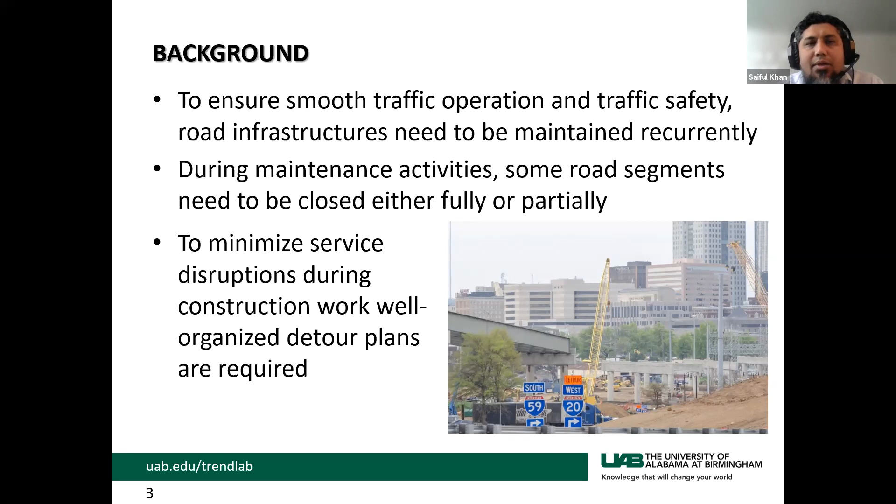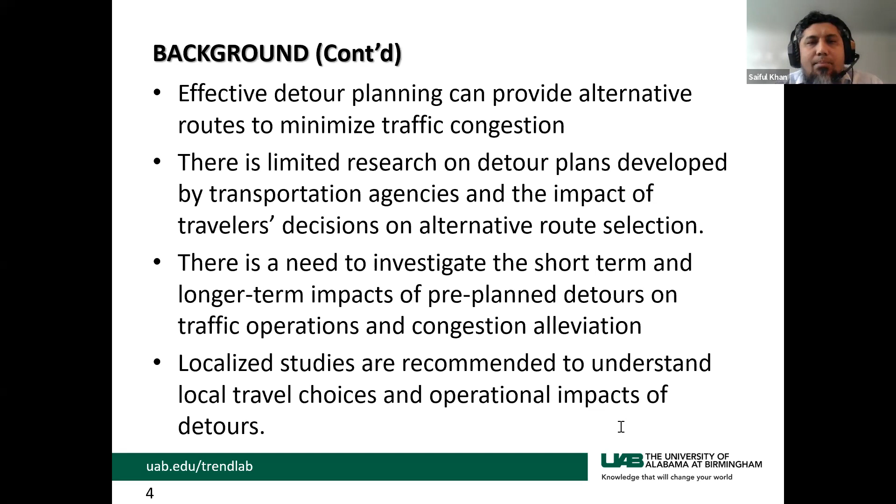So an efficient detour plan is essential to reduce traffic disruptions, but to design an effective detour plan, it is very important to identify beforehand the potential short-term and long-term effects of the proposed detours on traffic operations. A literature search on this topic led to the conclusion that there is much research done on construction work zones, but very limited studies that examine the impacts of complete road closure and detours on traffic operations. Local studies are recommended to reflect the impacts of local conditions. So therefore, in our study, we considered a recently completed bridge replacement project.

Now I would like to brief the project. This project was about the reconstruction work of a 1.5 mile road segment of I-20/59 near downtown Birmingham. The location of the project is very crucial, and it is one of the busiest road segments in downtown Birmingham. While the current traffic flow is 165,000 vehicles per day, it was designed back in the 1970s for only 80,000 vehicles. And it is also anticipated that the traffic volume for that segment will exceed 225,000 by 2035. That is why the roadway capacity needed to be enhanced.

And considering the traffic conditions and to carry out the construction works smoothly on such a busy road, this segment had to be closed for the entire year 2019. And for offering alternative routes to motorists during the road closure, ALDOT along with the City of Birmingham and the Regional Planning Commission of Greater Birmingham prepared a detour plan.

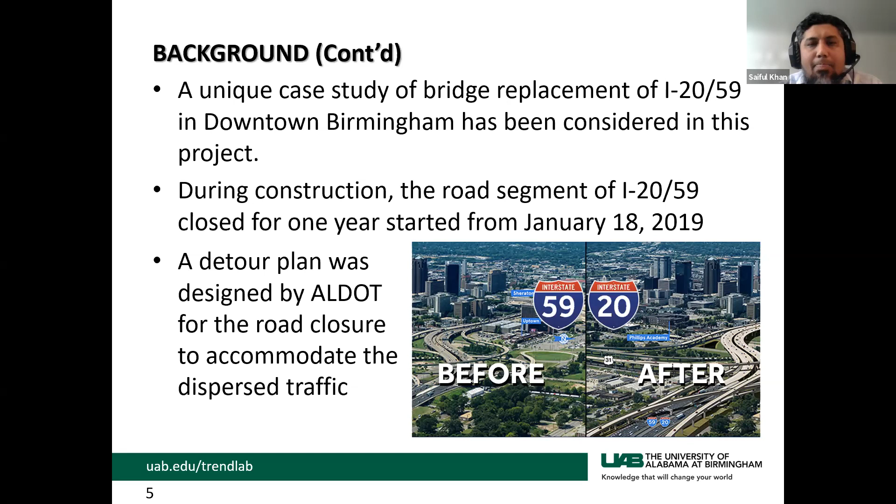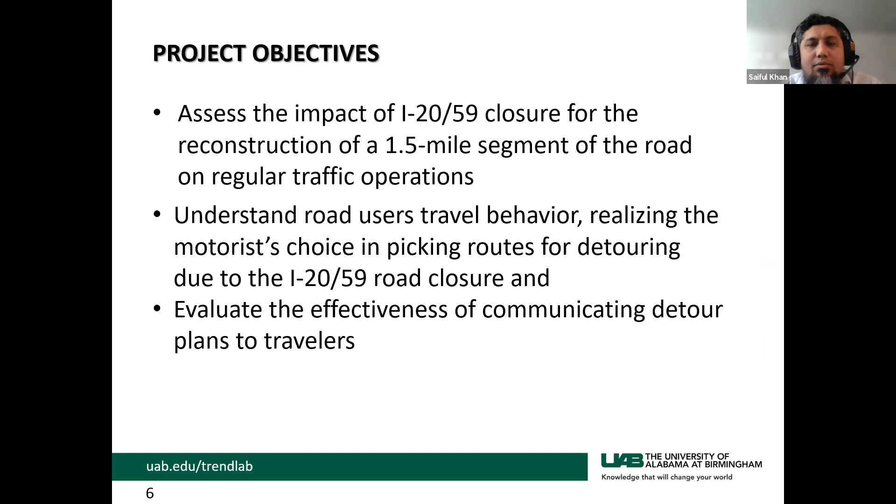So the purpose of our study is to assess the impact of detours on traffic operations at and around the road closure in the Birmingham, Alabama region by understanding the changes in motorist travel behavior during the road closure. That's why we followed this methodology to conduct our study.

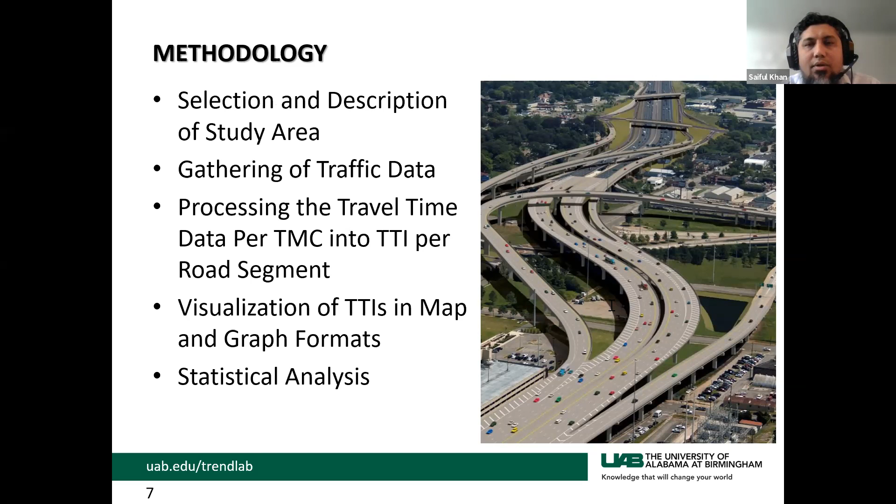First we had to select our study area, then data collection, data processing, and finally producing maps and graphs. We also conducted a statistical analysis for our study. So this is the study area. It was chosen mainly based on the ALDOT detour plan, as well as by analyzing the ArcGIS online roadmaps.

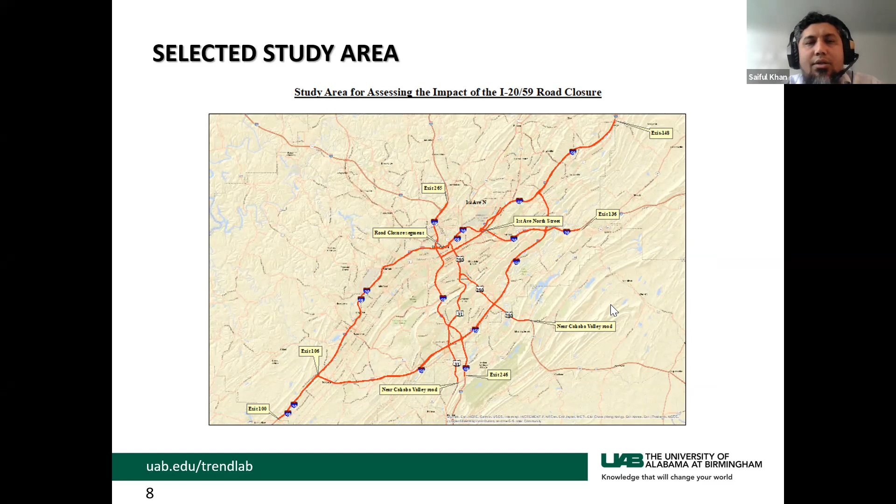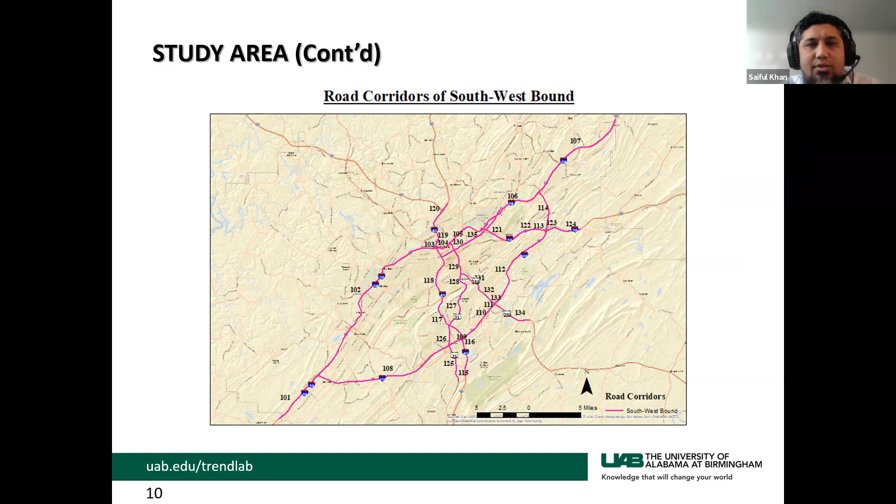For data collection, we collected the travel time data from the Federal Highway Administration sponsored NPMRDS, that is the National Performance Management Research Data Set website. After finalizing the roadmaps, they were synchronized with the NPMRDS dataset. As per the NPMRDS dataset, the selected area had 411 TMCs, that is traffic message channels. For northeast directions, there were 205 TMCs, and for the southwest directions, there were 206 TMCs.

We needed to collect 15-minute averaged travel time data for February 2018, that is before the road closure, February 2019 during the road closure, and February 2020 after reopening of the road. From the NPMRDS website, we collected 10 data points for weekday morning peak hours with 15-minute intervals starting from 6:30 a.m. to 9 a.m.

And 10 data points with 15-minute intervals for weekday evening peak hours starting from 4 p.m. to 6:30 p.m. There are 20 time slot data points gathered for each weekday of the month of February 2018, 2019, and 2020. Our raw data was travel time, but in our analysis we used the travel time index, that is TTI.

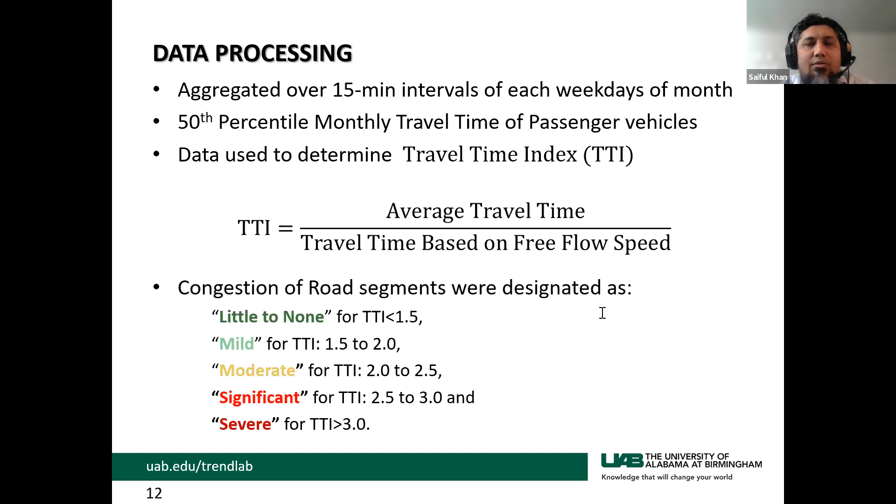Data analysis and results. We divided our data analysis and results part into 4 segments. In the first segment, TTI maps of road segments were developed using ArcGIS software for February 2018, February 2019, and 2020, for morning peak hours and evening peak hours separately.

Then we also prepared some graphs along the study corridors to see the TTI variations in each of the 16 time slots, that is 10 time slots in morning peak hours and 6 time slots in evening peak hours, for the whole 3 years. After that, we identified which roads were vulnerable during the road closure based on the ALDOT designated detour plan. Finally, a statistical analysis was done.

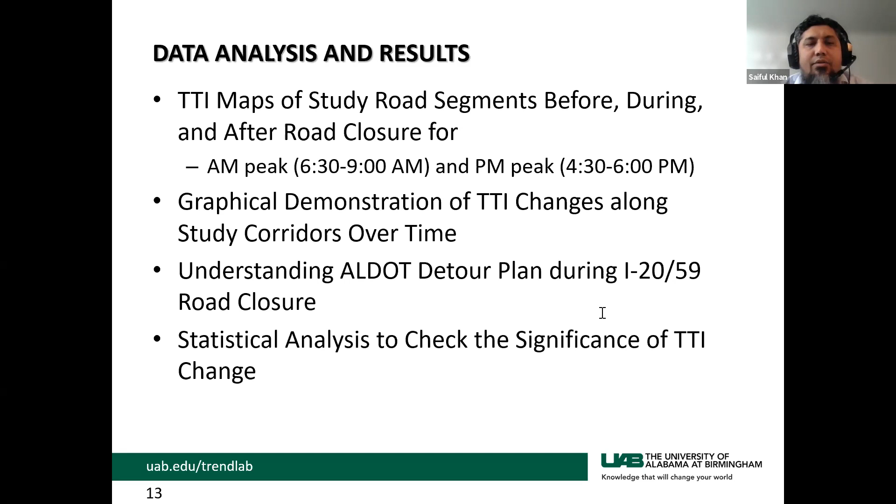T-tests were performed to compare the significance of TTI changes from February 2018 before closure to February 2019 during road closure, and February 2018 to February 2020 after road closure. So now we will see the TTI maps. Here I am presenting the evening peak hours TTI maps for 2018, 2019, and 2020. This is the TTI map for February 2018, before the road closure.

From this TTI scenario, we can see that except the I-65 southbound segments, all the interstates had decent TTI, which indicates little to no congestion. Apart from the interstates, some segments of US 31 and US 280 near I-459 were showing severe congestion. These are very small pictures, and it is really difficult to understand by seeing them, but to reduce the file size, I had to compromise on the quality of the pictures.

And this is the map for February 2019. That is during road closures. At least it is visible that there are more reds and dark reds in this map. So this map is showing the traffic conditions during February 2019 based on highest TTI value of evening peak hours. It can be observed that, unlike February 2018, several road segments of I-65 and I-459 were showing higher TTI and had mild to severe conditions.

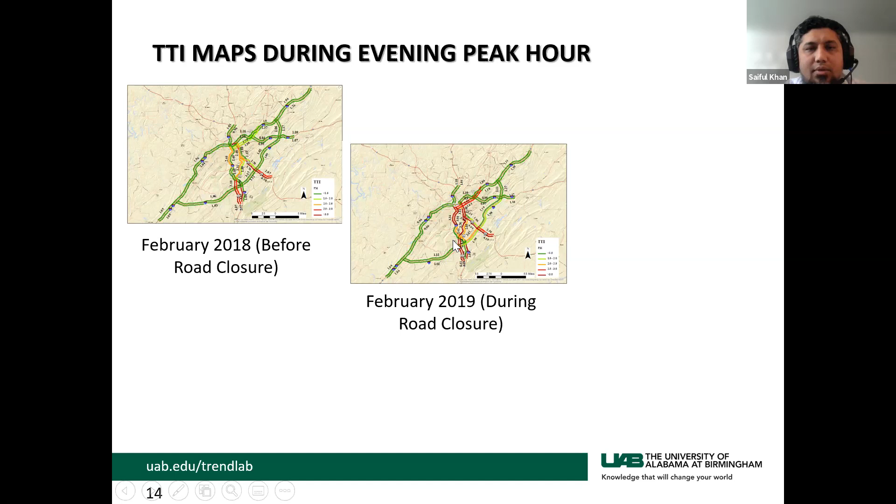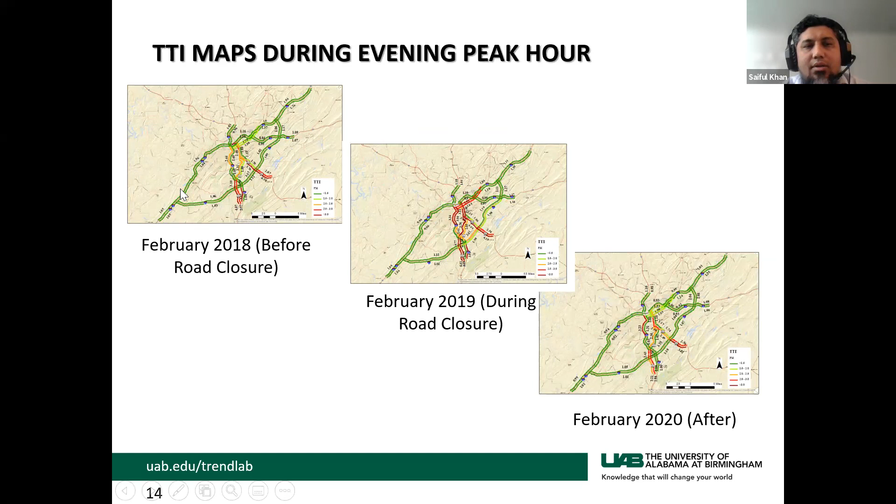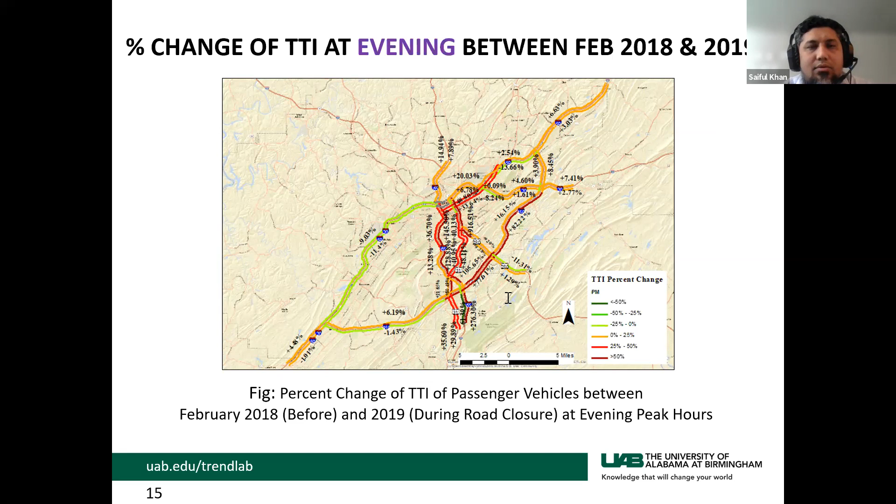And this is the percent change of TTI at evening peak hours from February 2018 to 2020. Here we can easily see that, before and after road closures, with some minor exceptions, 3 segments' TTI increased between plus 25% to plus 50%. Other than that, most of the TTI segments decreased from February 2018 to 2020.

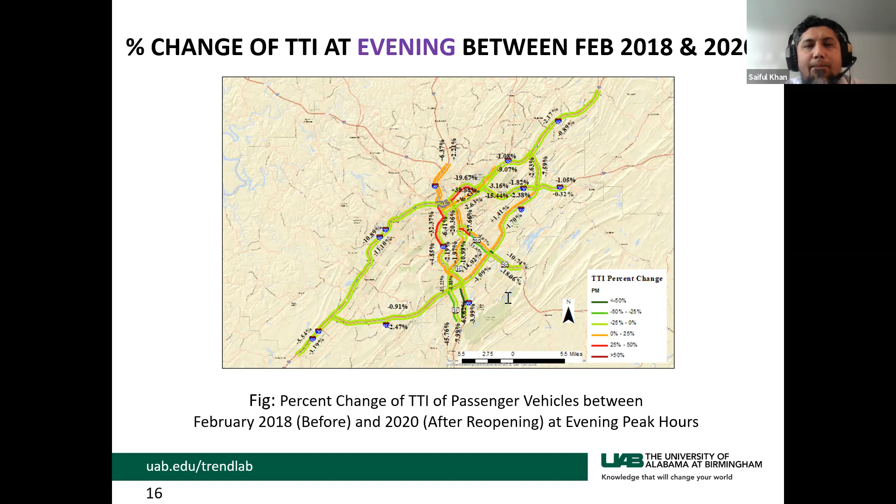These are the ALDOT prepared detour plans. This detour plan is for the interstate. The left one is for the westbound road closure, and the right one is for the eastbound road closure detour plan. It clearly shows that ALDOT suggested detours using I-459 southbound and I-65 northbound for the eastbound road closure, and detours could be made through I-65 southbound and I-459 northbound.

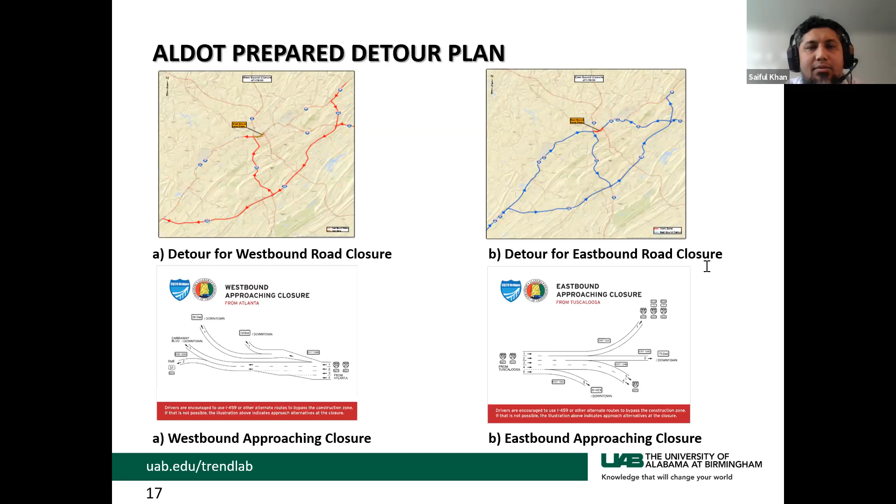These are the ALDOT provided detour plans for the local roads. From these local detour plans, we can observe that segments 18, 20, and 118 and 120 of I-65 northbound and I-65 southbound respectively, and segments 30 and 130 of US 31/280 northbound and US 31/280 southbound should be affected due to the road closure. The list of the probable road segments based on the ALDOT detour plan is furnished in the next slides.

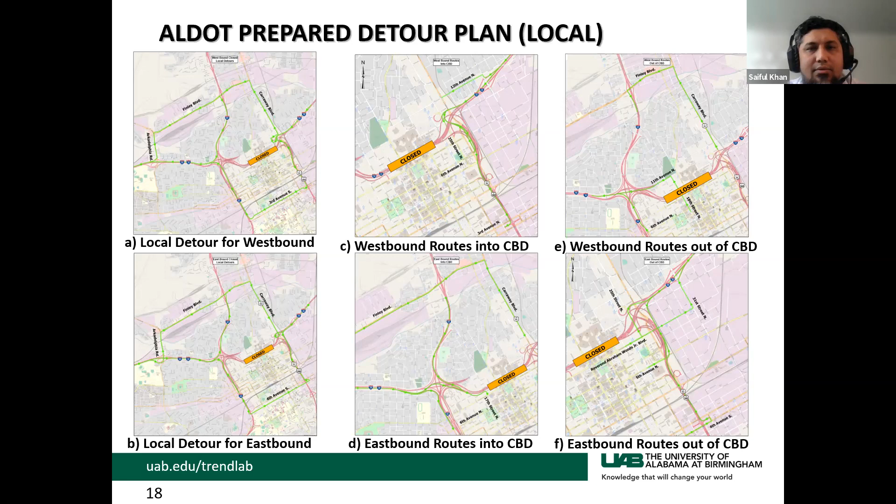Out of the 70 road segments, we sorted out the road segments that should be affected most due to this detour plan. As per the ALDOT designated detour plan, during the road closure, the road segments from I-459, I-65, and US 31/280 should be affected most.

Here, for the entrance and exit roads from the Birmingham Central Business District, we can observe that for the entrance roads, segments 118 and 120 of I-65, segment 130 of US 31/280 southbound, segments 18 and 20 of I-65 northbound, and segment 30 of US 31/280 northbound should be affected. For exit roads, segment 30 of US 31/280 northbound should be affected.

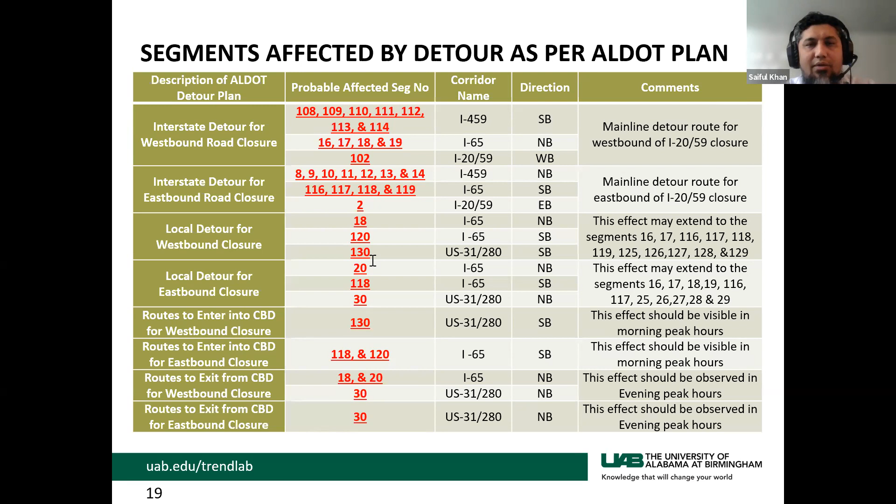And these are the TTI changes over the PM peak along road corridor I-65. Overall, the northbound I-65 corridor experienced much higher congestion in 2019 compared to before and after the I-20/59 construction project.

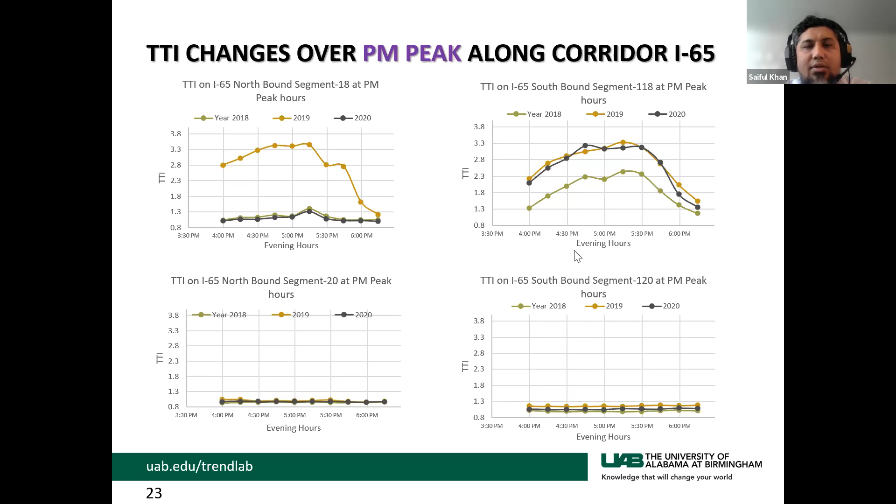So here it can be observed that TTI values for 54 out of a total of 70 segments experienced statistically significant changes at evening peak hours between February 2018 and February 2020 after facility reopening. This hints that some permanent shifts in travel patterns may have taken place post-construction, as motorists may have become accustomed to the alternate routes, thus choosing to keep them even when diversions are no longer needed.

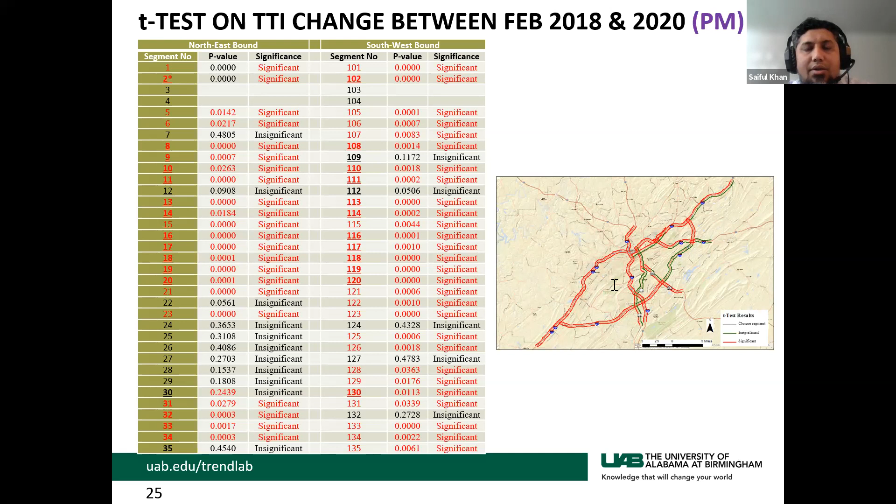So the study analysis showed, in conclusion, by comparing the TTI value between before and during road closure, in case of the I-20/59 and I-59/I-20 corridors, the changes were between -15% to 10%, which is not significant enough.

In contrast, the test results of TTI comparisons for several road segments of the I-59, I-20/59 corridors were insignificant. Hence, we can say that the study confirms the motorists chose the ALDOT provided detour plans, as the traffic patterns of those corridors in February 2019 reflected those choices.

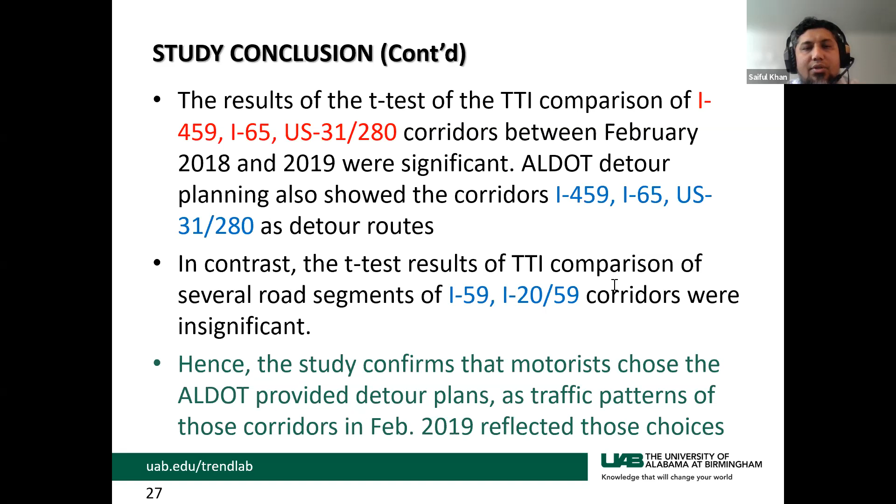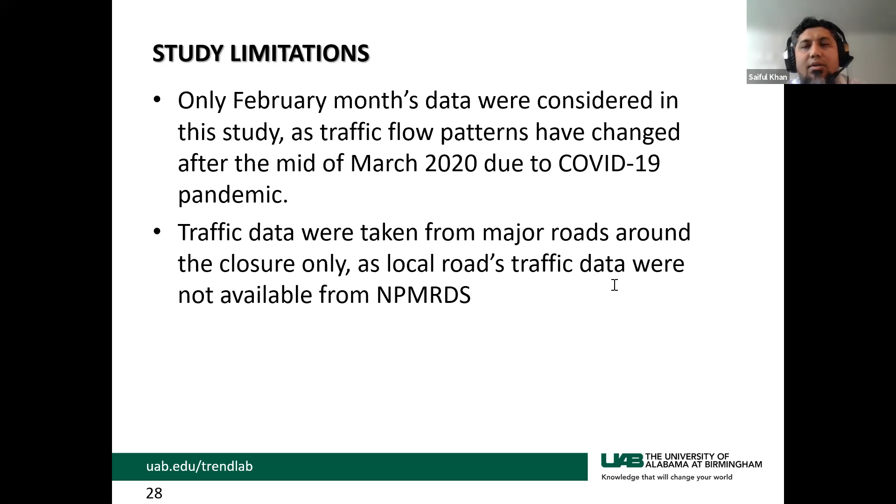So the limitation of our study is that we have taken only 1 month each to compare the traffic operations impacts; it would be great if we could pick some other months. Unfortunately, because of the COVID effect, traffic patterns changed after mid-March 2020. Also, traffic data of local roads were not available in the NPMRDS website. Only major roads' traffic conditions were analyzed in this study. There were some incidental closures for 2 to 3 days in the local roads around the closure, which could not be assessed in this study.

So in the future, to get motorist opinion regarding the ALDOT designated detour plan, survey work would allow us to know the actual feedback from the users in realizing ALDOT detour plans' effectiveness. In fact, a survey of road users is currently underway to assess how the motorists choose their detour road during the road closures.

So this study will help in quantifying the impacts of travel pattern changes in response to the I-20/59 bridge reconstruction project and provide insights about the likely influence of detour planning on traffic operations in and around the affected areas. The lessons from the study will provide valuable guidance to the agencies responsible for planning, design and operations of large-scale construction work, and will assist them in executing successful traffic management plans in future.

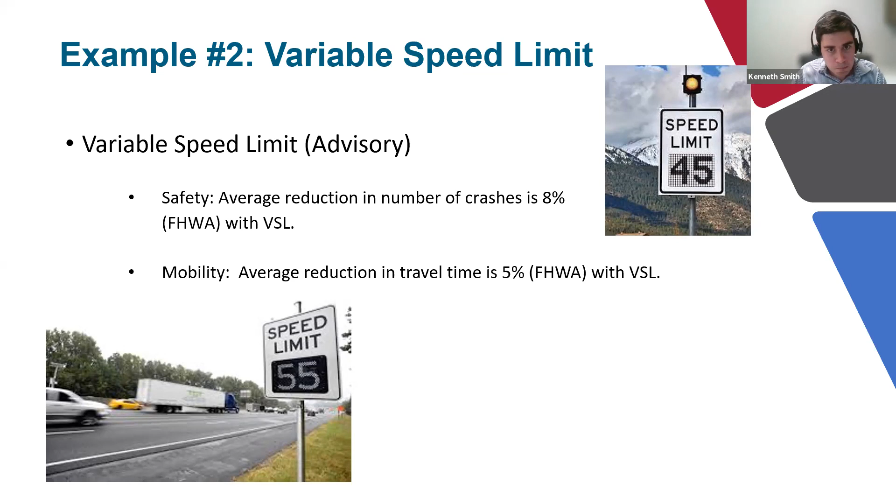So going through the example here, the main takeaway, because you can see similar things, we're able to find mobility numbers, safety numbers. For energy and environment, don't think only of CO2. You can also find data for other greenhouse gases that you can put in there. The main thing here is that we want to show how even on this site, the variable speed limits are going to have a higher benefit after getting all the calculations for this specific site compared to the cameras.

Benefits are going to be way higher, but also think about the cost, O&M, like we were mentioning before. At the end, all these numbers are going to change. There's not just one number that's going to apply to variable speed limits, not just one number for CCTV cameras. Things are going to change depending on the data that you have and where you're placing them. So just something to consider.

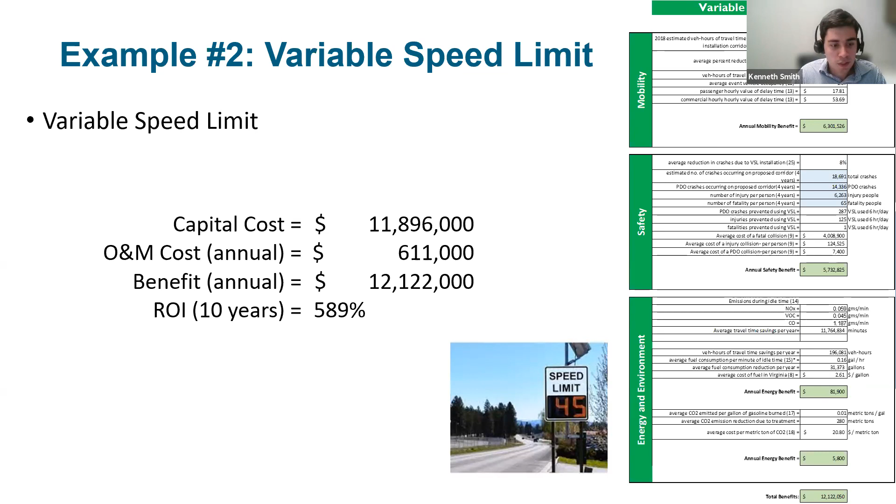So now I'll give it to Natalie so she can talk a little bit more about step 6 and how to communicate this information. Thanks, Kenneth. So Inger and Kenneth have talked about how to calculate the benefits and compare it to the cost. Now let's talk about how to communicate the results.

And so I think this is a really critical piece that sometimes maybe doesn't get the thought that it deserves. It seems straightforward, but I think sometimes we're just moving and don't think about it as much as we should. So considering who your audience is and what you want to communicate with them, I think is really important. And so thinking about what is relevant and what is relatable to them, particularly within different audience groups. And we're going to talk about decision makers, operators, and the public. Next slide, please.

Thanks. So decision makers. These are the people that are responsible for prioritizing projects a lot of times. They're required to demonstrate fiscal responsibility. And what we found in our experience is that communicating BCR, so the benefit cost ratio, and the ROI to these groups has been really successful. And depending upon your particular group, they may require it to be in a certain format and such, and depending upon how you're using it to compare.

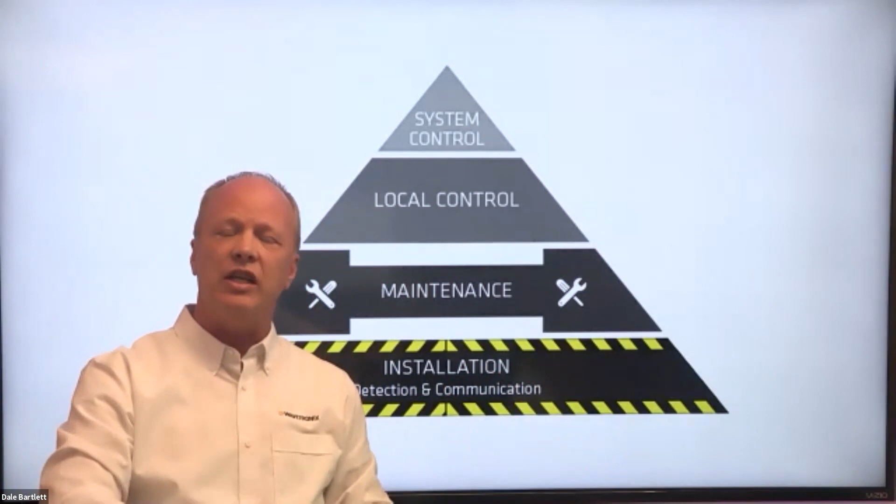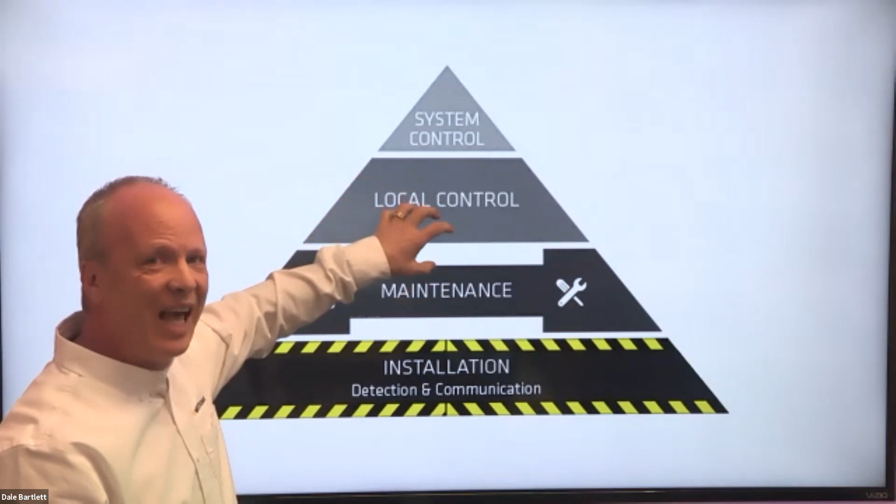Some agencies have gone corridor by corridor with this pyramid, utilizing things like adaptive systems to improve a corridor at a time. Other agencies have gone intersection by intersection, first improving the detection and then the communication, then moving on from there. So there's different ways to tackle this, but ultimately it comes down to making sure that the detection and communication is as maintenance free as you can possibly get it to give you the best local control, because that data is going to feed your system data. What you ultimately want is that system control of your local intersections.

So what of other industries? What can we maybe borrow from others that utilize similar technology to be able to do this? Well, air traffic controllers have developed the ability to see the full coverage of both their spatial awareness and the situational awareness of all the traffic that's in the skies. They have information about what each object is, what type it is, its location, its speed. There's a lot of data that goes into this so that they can have the right trigger points and the right data sets to take care of the situations before they happen. So as these approach, where are they in relationship to one another, elevation-wise, speed-wise, direction-wise, all of that type of thing.

Early on, a lot of this was very manual, and so it was more in that intersection control; they were trying to control this more at a human level. And then as technology improved, they were able to get more data points. Then they were able to move into the system control that they desired.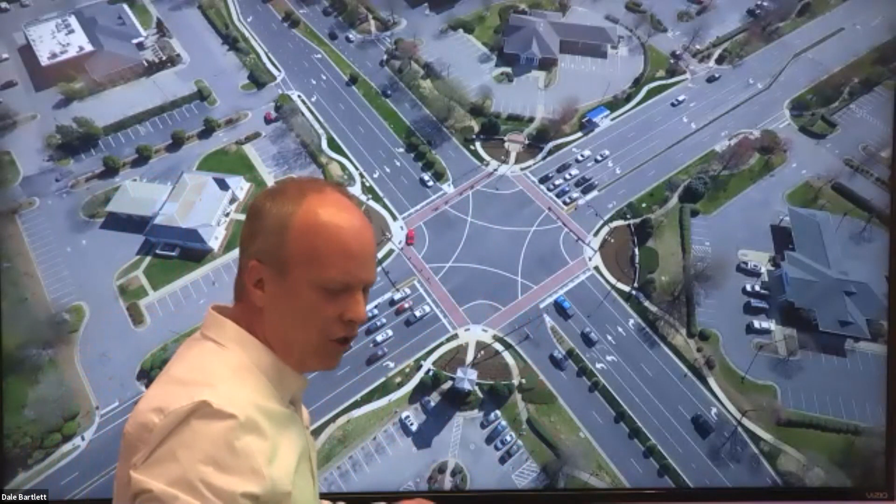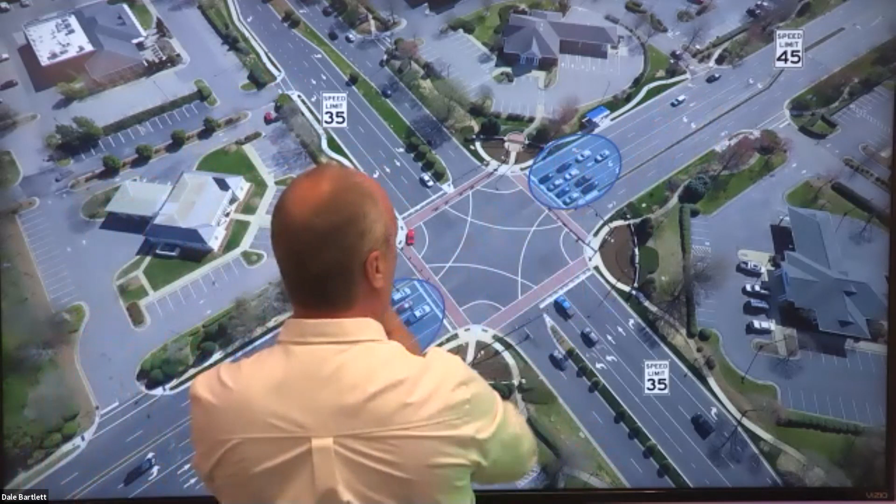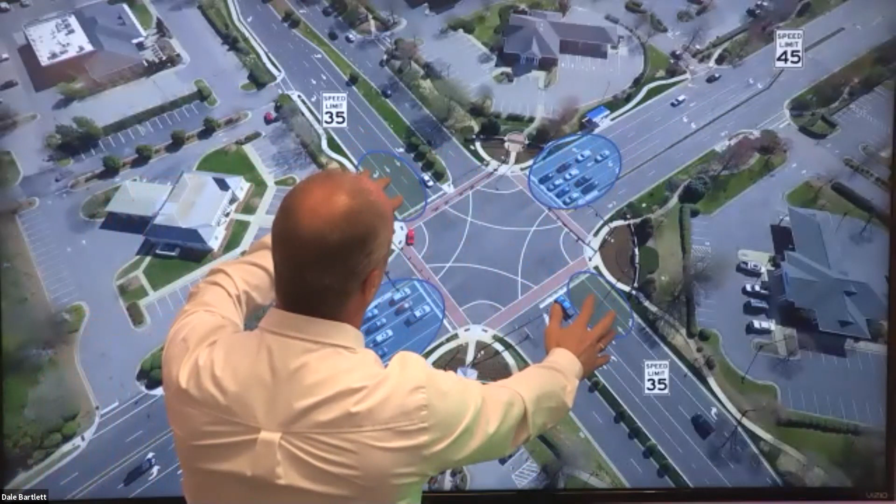What we know maybe is the speed of this approach. We know the speed of the side street. We know that we have vehicles stopped here. What's the information that we can gather from all of that? We have a situation where right now, this is the green phase, but we have no vehicles here. What can that tell us? We have other information such as vehicles approaching the intersection on red. How many vehicles approach on red? How many vehicles approach on green? What are the types of data sets that we can gather from that?

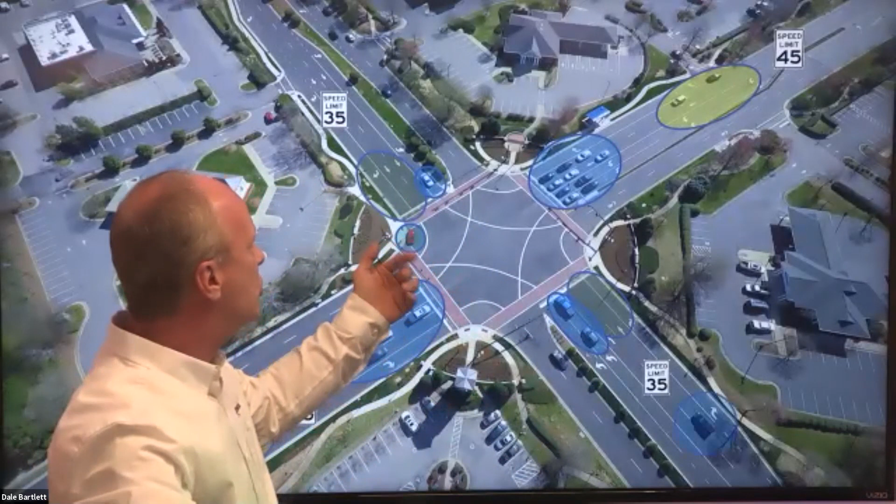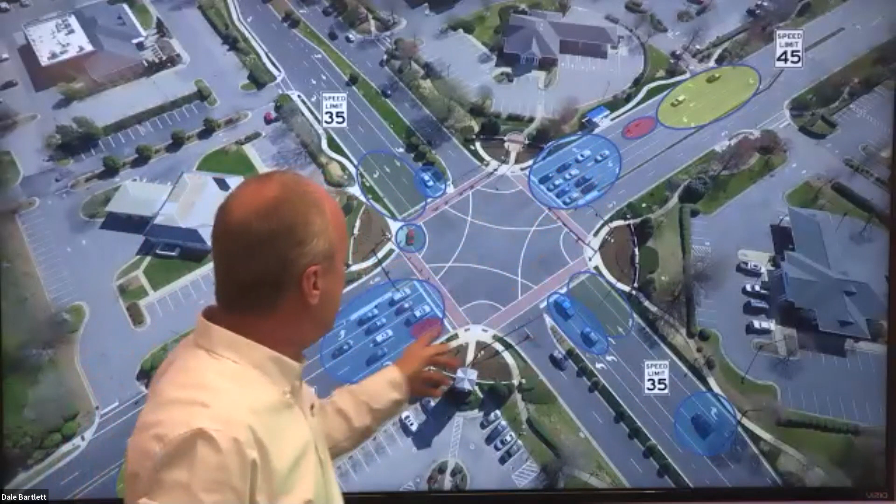We have vehicles that are needing to turn. We know that this is a double left, it's protected; those are other things that we can know about this. We have a vehicle turning. We have a vehicle approaching on green. What other information do we need to know about that vehicle as it's approaching? And maybe we throw some bicycles into this mix, and then we've got maybe a large vehicle approaching. What data do we need from this vehicle?

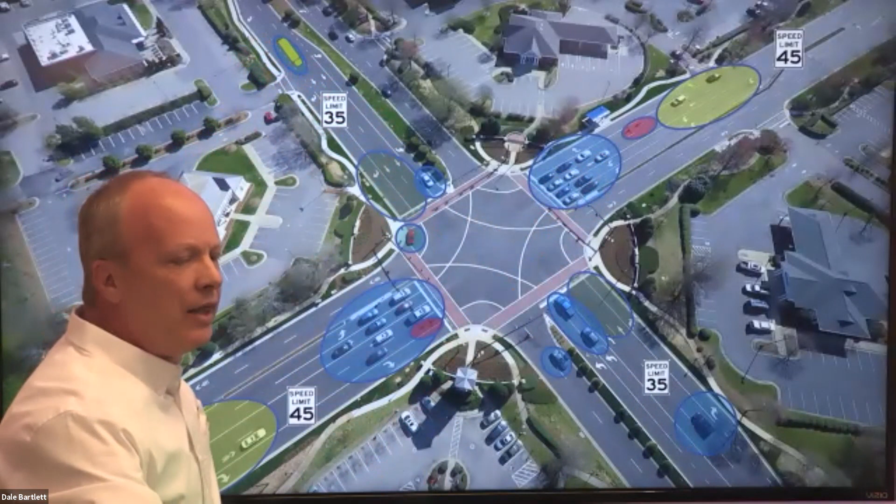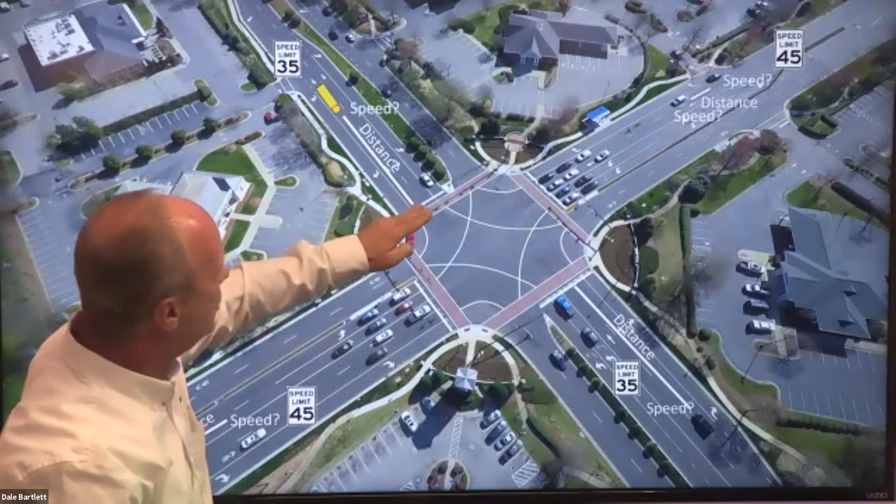Those are the types of things that we need to know. And how do we gather that information as we look at this? So if we look at it kind of like air traffic control, could we see not only the distance between vehicles, maybe it's the distance between vehicles as they're approaching infrastructure such as the stop bar, and then do we understand the type of vehicle that's approaching?

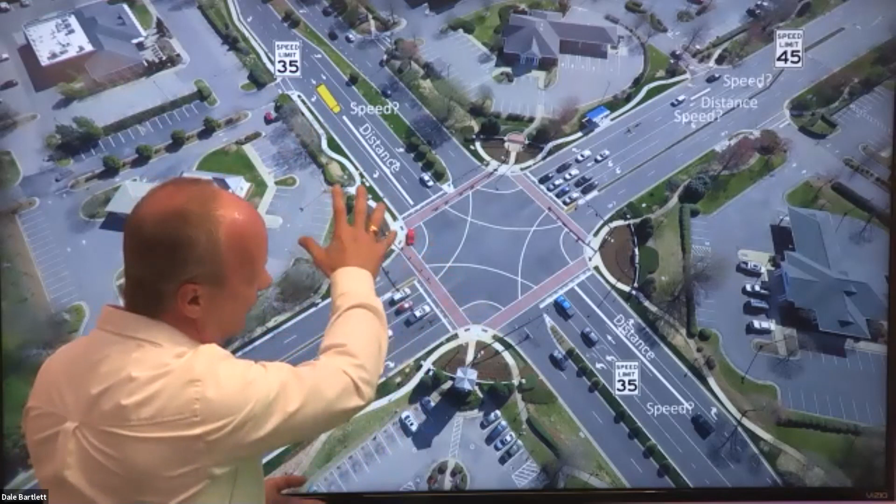What if you no longer had to worry about adding additional passage time as vehicles were trying to get through, passage time that makes intersections inefficient, and you could utilize dynamic tracking of vehicles all the way in? What would that do to make an intersection more efficient? Well, let's look at the different ideas.

What we really need to do is that local control of that intersection and being able to provide those data sets for that local control. Then we can pass that information on to the systems that rely on that good local intersection control data. Without first securing the good data points that are needed by the engineers, and a lot of times it's not what a lot of manufacturers even want to be able to create,

format the data to just make it look pretty and have really pretty data sheets and formats and those types of things without understanding the reliability and accuracy of that data. If you are going to build that strong pyramid, you need the right data and it has to be good. It just doesn't have to look good on paper. And that's vitally important when you're looking at these different systems.

So I'm going to switch views here really quick on you. This kind of creates the uniqueness of this. We're going to kind of whiteboard this out a little bit if you will indulge me. If we have traditional types of detection, whether it's loops, whether it's zones, whether it's certain technologies of radar that only give you point information, we only see certain aspects of what's going on on our roadway.

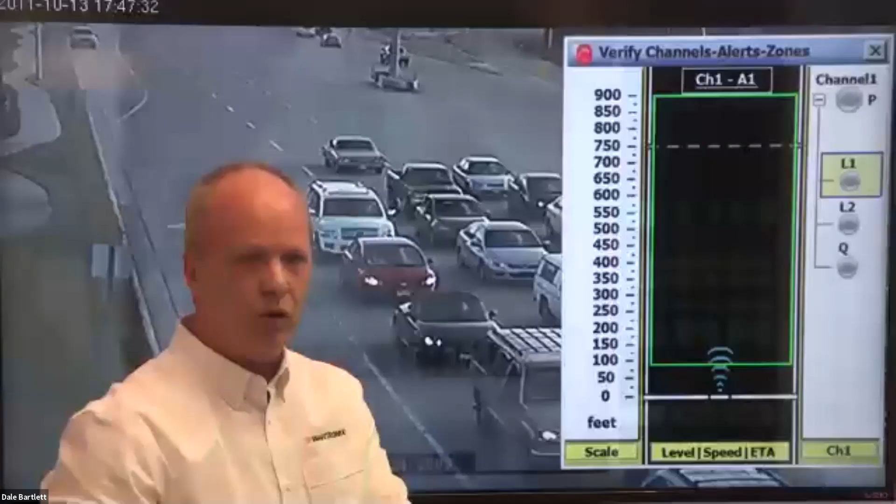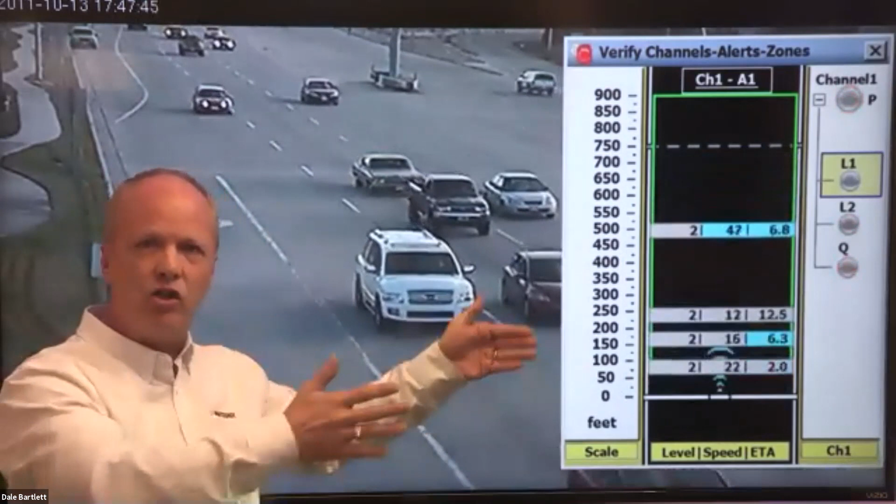If we knew what type of vehicle that was, and we're going to show you now what that looks like in regards to the technology that's available to us today, and being able to understand what we can do differently, because those larger vehicles have a stopping distance of between 2.5 and 7.5 seconds in the dilemma zone. And so their stopping distance is much larger, so they need a larger dilemma zone. And how does that relate to the other vehicles?

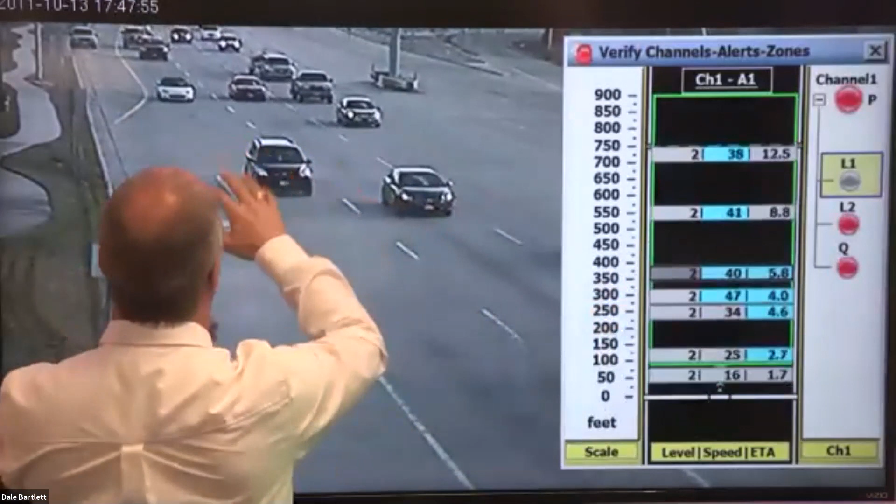As we get these vehicles approaching, we can gather their speed information, their ETA, their other data that they have. But what we really want to also do is gather as this other vehicle comes down in and is tracked here, we now have a different type of vehicle. How do we treat that different type of vehicle differently? What kind of parameters can we give it in relationship to distance, in relationship to speed?

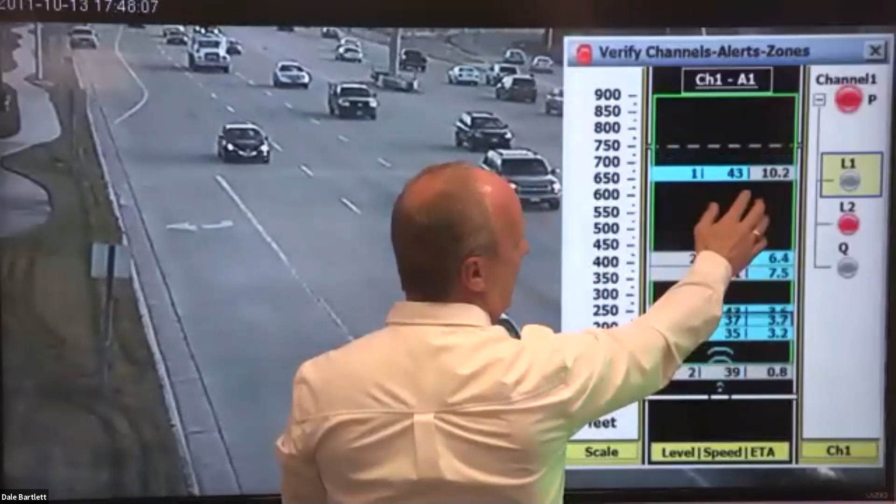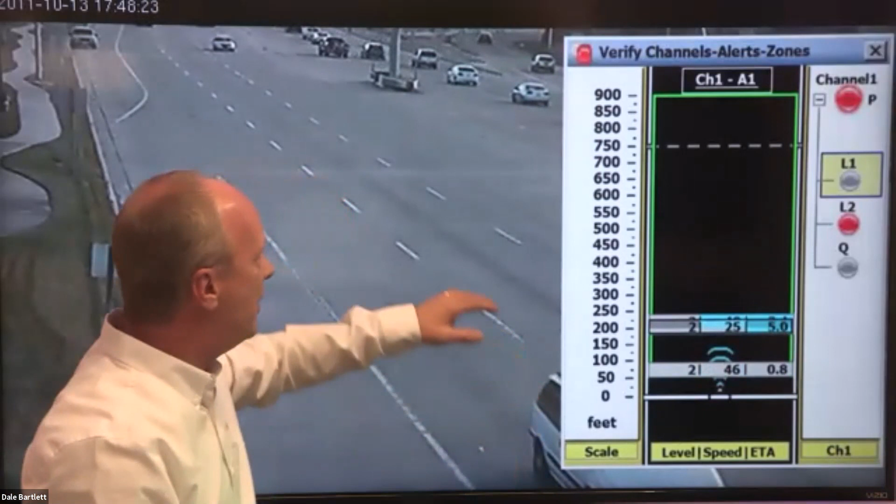And as that vehicle is tracked in, we will find a time when that vehicle at 7.2 seconds is now eligible for making sure that they have the passage going through that. That can be set up, and you have the ability to not only create caveats and other things to make that intersection run more smoothly, but now you have the data sets and the spatial awareness and the type of vehicle, all of those things that you need in order to make that happen. So there we go.

What about utilizing other data sets to understand infrastructure, such as vehicles approaching or backing up on a roadway and blocking a fire station? Or what if we had vehicles having to worry about blocking a railroad track, other critical infrastructures? If we look at how that is utilized within here, say we erase some of this information here, if we've got a critical infrastructure such as a fire station here, and we've got vehicles backing up on it, what is the spatial relationship of these vehicles, their speed, their position in regards to this, so that when we see speeds drop, let's say down to the 3 to 4 miles per hour range, we know we're starting to get a queue up. And can we then send a signal and be able to do that?

Same thing with railroad tracks, maybe in a really bad spot to put railroad tracks, but sometimes that happens. Other infrastructure such as a ramp onto the freeway system, and it's really short, and you get cars that back up onto your roadways. Yes, this is an issue that maybe the DOT has to work with, but it also affects an agency in regards to what they need to understand there. So how do we understand, again, where those start happening, not just in certain points, but we have constant data communication with every vehicle.